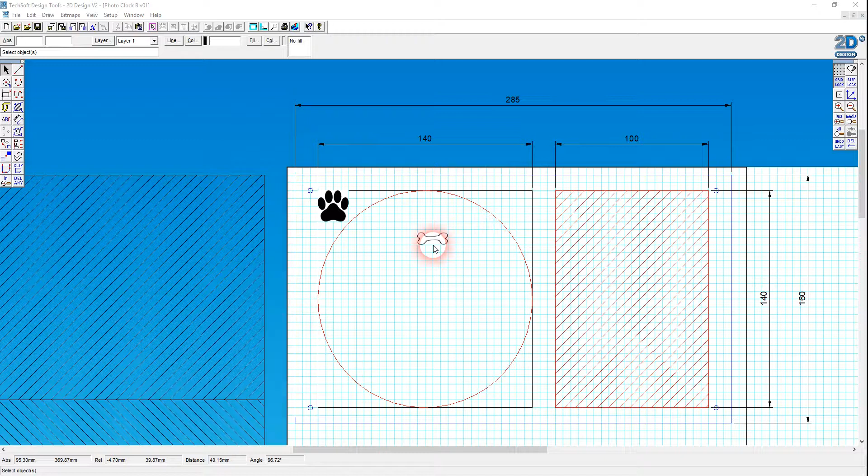So in this video I'm going to add the paw decoration around the outside of the clock, and we'll see if I get onto the bones or not. I might do the bones in a separate video to sort of break things up a little bit. My videos tend to go on rather long. So let's have a look at this paw.

Now first of all, my feeling is that I want to have the paws all the way around the clock, but I don't want to go outside this square because it kind of defines a nice border. I'll probably end up not laser engraving or cutting the square, but I'm going to leave the square there just to give me a framework, which is going to give me an edge for my paw design. And what I'm going to do here is actually make the clock a little bit smaller.

So at the moment, let's just come to the dimension lines here, and again it's gone to my extended desktop, so we'll take it over here. Let's come onto my dimension lines, hold the mouse button down, come on to a dimension tool here, and let's just indicate the dimension of this circle. So that circle is 140 millimeters in diameter, and you can see the square that defines the boundaries of that circle is also 140 millimeters in width and in height.

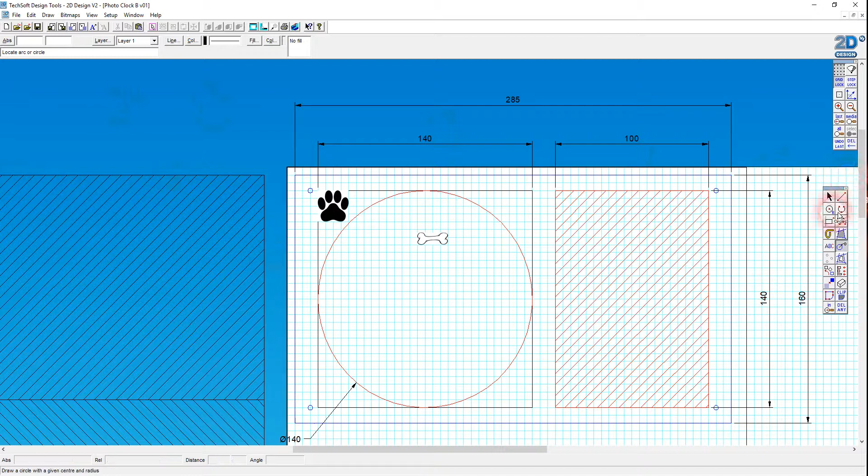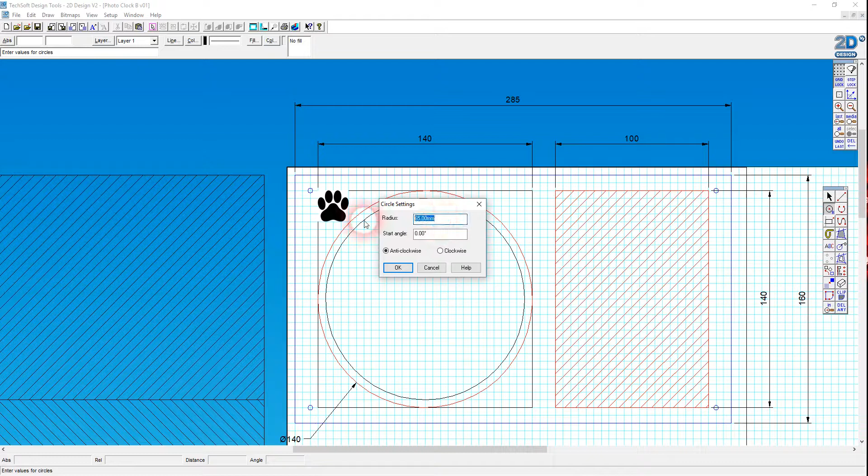My thinking is that if I get a new circle with a given radius, I'm going to take this down to 65. Let's just see how this looks, and I'm going to make sure I use the same center point. Okay, and then if I do that again, I'm going to right click on that tool and put this down now to 60 millimeters, and I'm going to draw another circle here. Now what I'm trying to think about here is having a margin, a space where I can add lots of little paws,

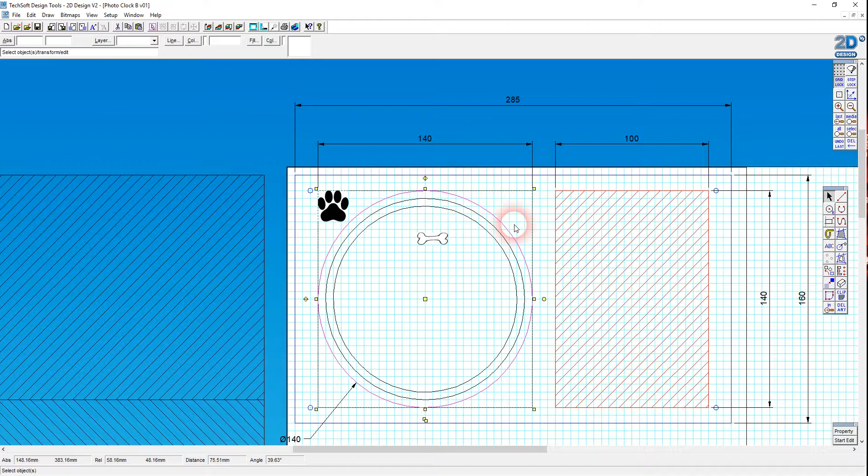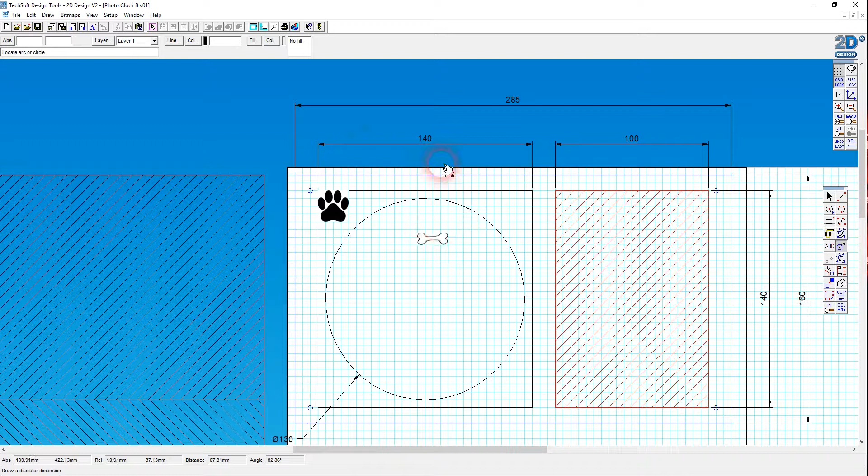but then still have space here for my clock face, and have the little paws kind of coming in this gap. I'm going to delete that outer circle, delete this inner circle, and I'm going to fill this area here with lots of different sized paws. So I don't need that dimension line anymore. I'll select it and press the delete key. And do I bring a dimension line in there? Yeah, I think I should, just for completeness. That's 130 now.

So I've reduced the size of my clock, but I'm going to have a nice kind of paw print border. Okay, next, let's take this paw print here. I'm going to bring it to the side and pop it there. Let's just zoom out a little bit. And I'm going to select these two frames here.

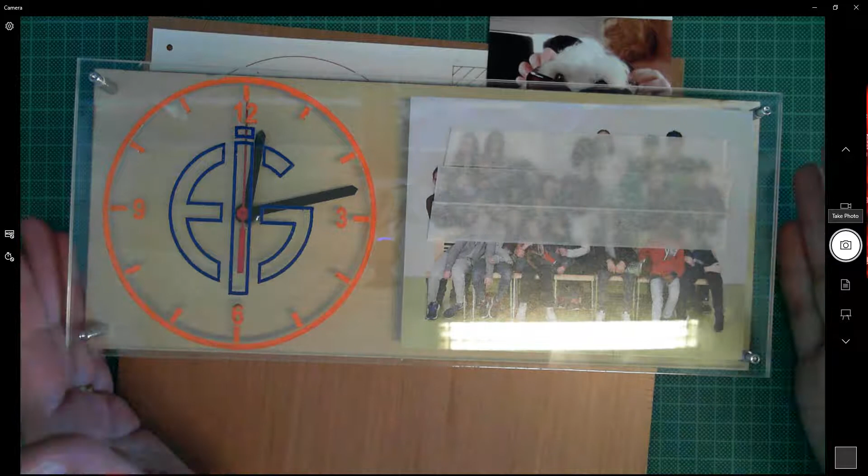Now, they were actually from my first video when I was talking about the size of the original clock design, why I scaled it this size in order to be sustainable and reduce the amount of waste when laser cutting from these veneered sheets of MDF. I don't really think it's relevant anymore, so check out the first video if you want a reminder about that. But I'm going to delete this. Normally I don't delete anything from my CAD files. I move things off the drawing area to the side, as I've done here, but these elements do not relate in any way to this new design. So let's just delete those.

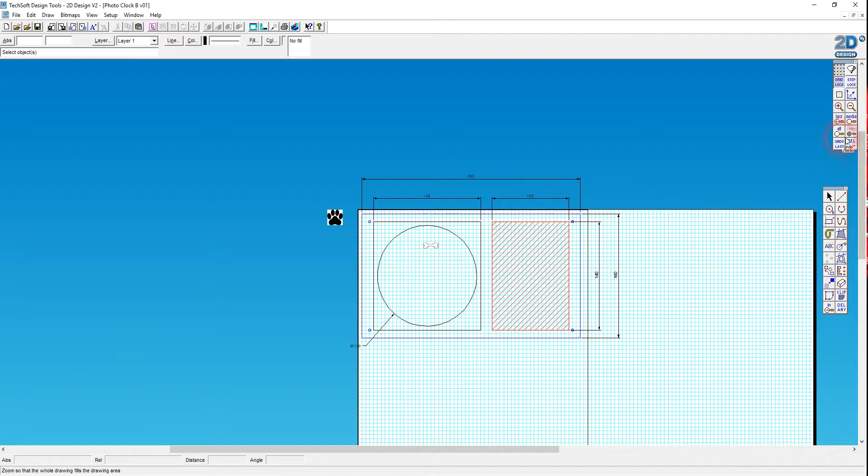And now I'm going to be using this space to map out some different sized paws. So let's go back to the last zoom. In fact, let's zoom in a bit more, to that point there. Now I'm going to select this paw, and I hope I do this correctly. I'm going to come to my transformation tool, to alter the size of the selected objects, and I'm going to reduce that by 20%. So I'm going to take it from 100 down to 80%, and I'm going to repeat that. Let's see.

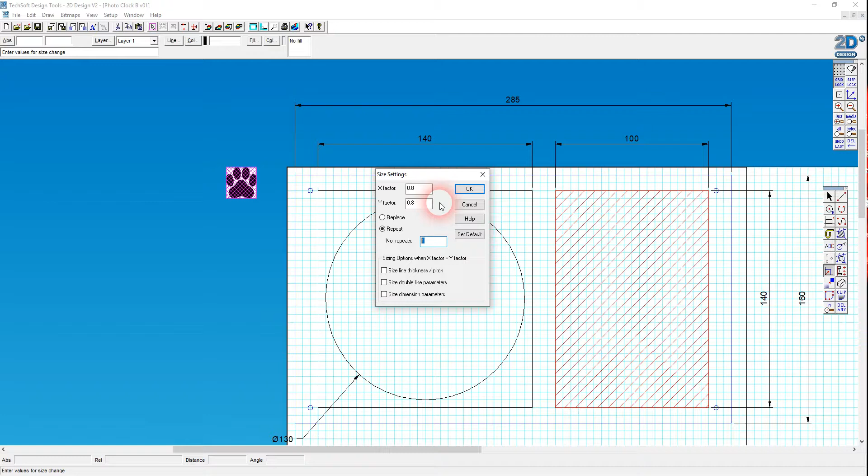The first repeat will go down to 80%, or 20% smaller should I say, and then the next one will be 20% smaller again, then the next one 20% smaller again. So it's going to go from 100 to 80 to 60 to 40. So that's from 100 to 80 once, 60 twice, 40, 3 repeats. I hope that's correct. I'm going to confirm, and I'm going to click down here, and hopefully, yeah, perfect.

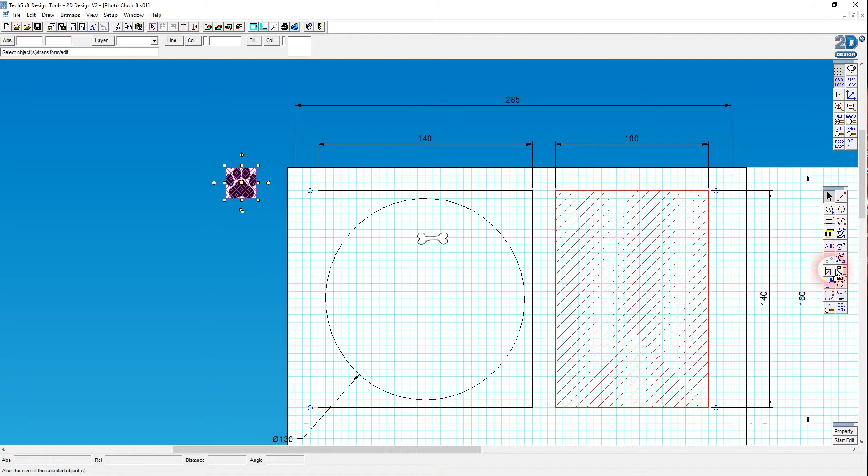So where my mouse pointer was, that's like the 0 point, and it's scaled everything down to that kind of vanishing point. So now I've got these 3 different size paws. Now is that enough? I feel as if I could have a smaller paw again. So I'm going to undo that. I'm going to do it again, but I'm going to go a 4th repeat, which is going to be down to, if I'm not mistaken, 20%. So let's just make sure that goes straight down there. Okay, so 100, 80, 60, 40, 20%. I hope that's correct.

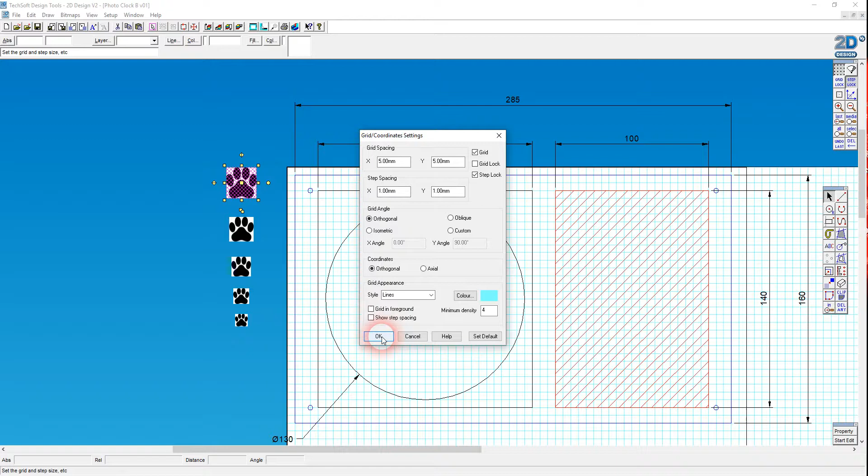And now what I'm going to do with these is I'm going to duplicate them and position them. Let's just check out my step spacing. Yeah, my step spacing is 1 mm, so I'm going to go with that. Let's duplicate it, let's position it, and let's rotate it. Now that's a massive paw. I feel as if anything that's too big. This paw here, duplicate, drop, rotate. Is that too big? Maybe it's okay. Let's duplicate that. So I'm always keeping my original on the side here.

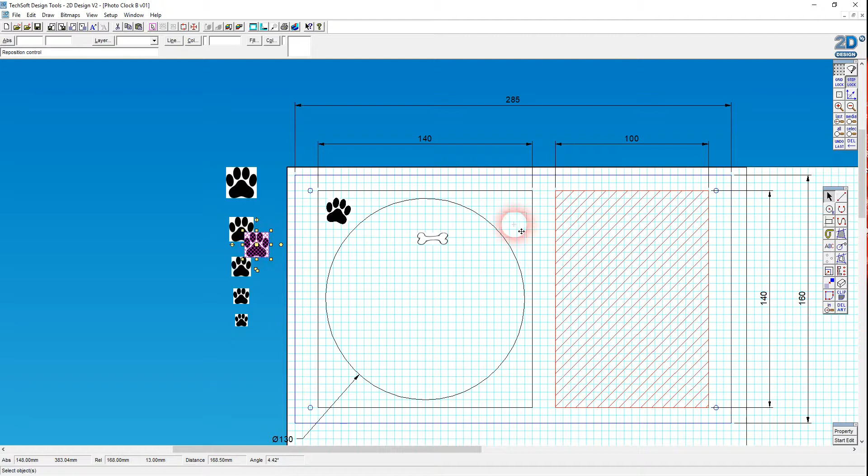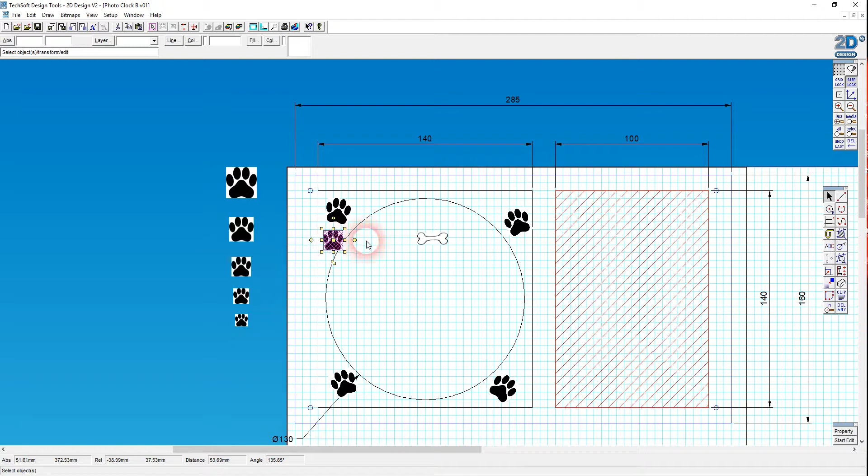Let's take that to the side here, and I don't want this to be too uniform. I want it to be quite a random pattern. I say random, and then I'm putting those in each of the four corners, but I just feel as if that's going to be a nice kind of frame to begin with. Something like that. How does that look? Yeah, I'm kind of okay with that. Let's take some of these here. Can I duplicate this? Okay. Can I kind of position those around?

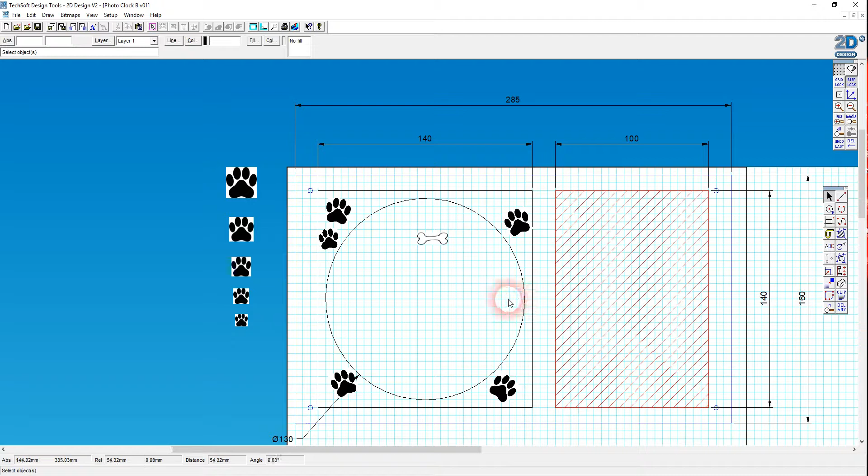I'm kind of thinking that these paws are actually really massive here. So I think I'm going to pause the video. I might just actually go with smaller paws. I might make these the biggest paws and actually scale these paws to even smaller values to really try and get lots of little tiny paws. I think that's going to be more cute. I don't want to spend forever on the video doing this. I'm going to pause, go ahead and do it, and then resume when I've got something good.

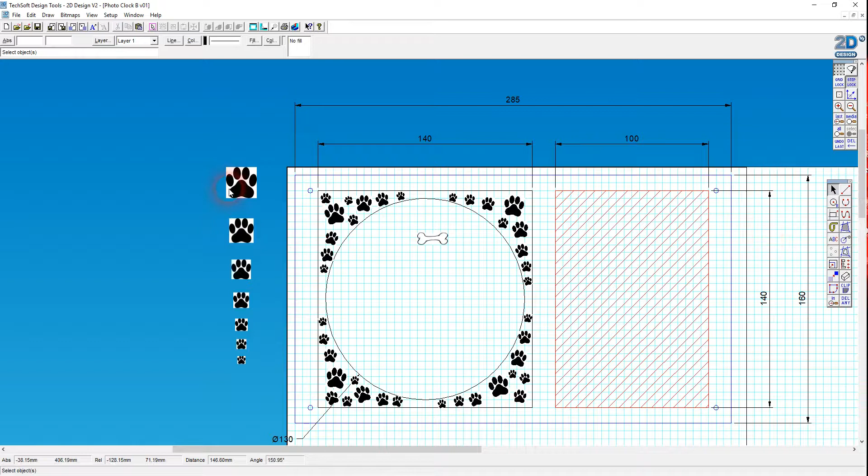Okay, so that's got my paw principle in place. Am I convinced? I might just zap that one there. Let's just get this one in. I'm going to pop that over there, just to finish like that. That's kind of all right, isn't it? Oh, I'm just pixel peeping now. Anyway, I actually ended up having 6 repeats here. If I just come to the settings there, whoops. Let's just try that again. Select an object, come to this alter size, 6 repeats, so it gave me an even smaller little paw down there.

And I actually think the way that this works is, this is 80% of the size of this one, that's 80% the size of this one, 80% the size of that one, so I don't think they're all scaled against the first one. I think it's 80% the size of the previous repeat. Anyway, I think that's digressing. So that's my pattern done for my paws. Should I have even smaller paws working around here? I kind of think maybe I should, but I'm going to stop there. And maybe when we do my next card prototype, we see how it looks.

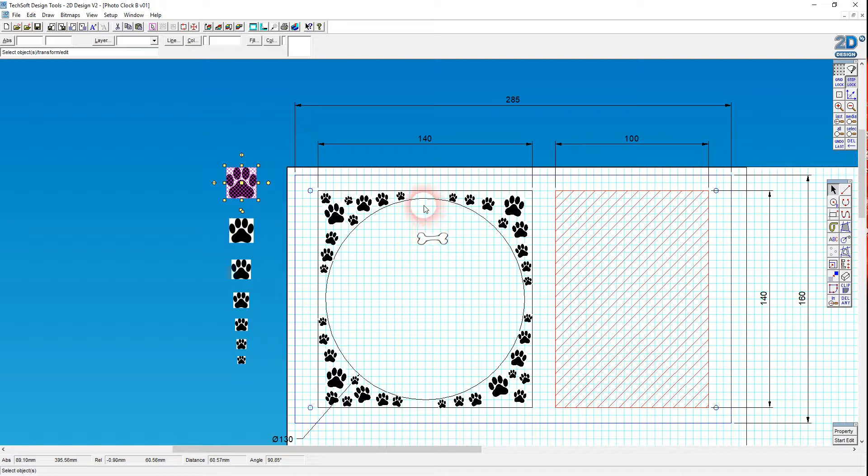In the next video, I think I'll add the spindle hole in the middle here, and I'm going to be putting these bones on the 12, the 6, the 3, and the 9, and then I might scale it down and do the other hours in a slightly smaller bone. So I'll demonstrate how to do that.